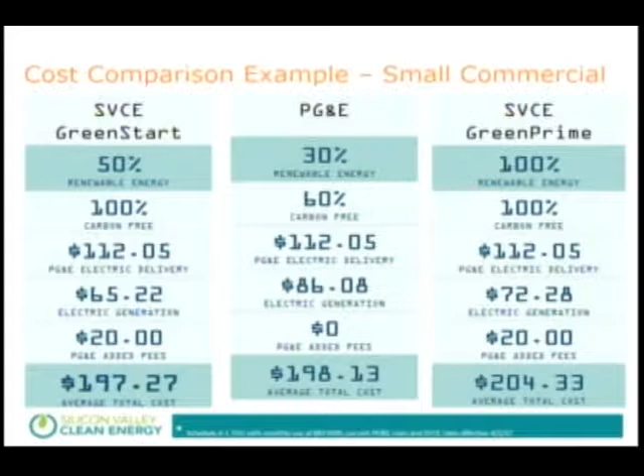2 enrollment phases, as I mentioned. Some of you went in April, most of you will be going in July. If you are a solar customer, you're on a slightly different enrollment schedule. You will enroll at or near your annual true-up date. So how many solar customers do we have here? Should have figured, quite a few. If your true-up dates are later in the year, you'll enroll either in October or in January, and the point is to try to synchronize it with when you would be approaching a natural end to your true-up year. If you want to go sooner, you can go on our website and enroll early.

So in summary, Silicon Valley Clean Energy is about clean electricity at competitive rates. By signing up and joining Silicon Valley Clean Energy, you're helping move the needle in an incredibly substantial way in terms of greenhouse gas emissions. GHGs in Sunnyvale and surrounding communities are between 20 and 25% of the greenhouse gas pie. We're providing carbon-free electricity that takes out that quarter of the pie.

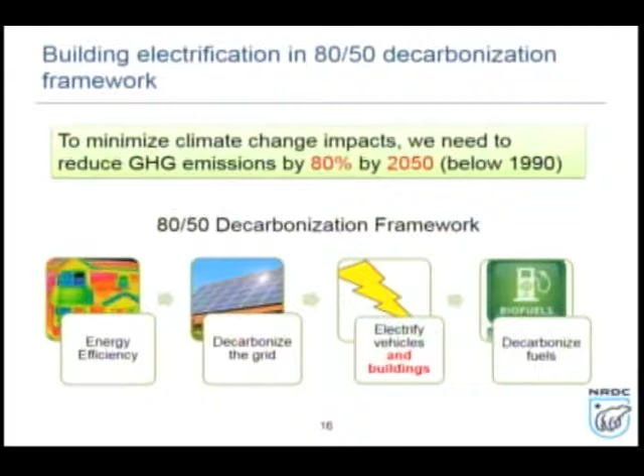Today, just to give you an idea, we're going towards 50% renewable electricity in the state by 2030. There's no target, not even 1%, renewable gas standard today. So we're far behind being able to decarbonize gas, although that's something we need to work on. With that in mind, let me dive into building decarbonization.

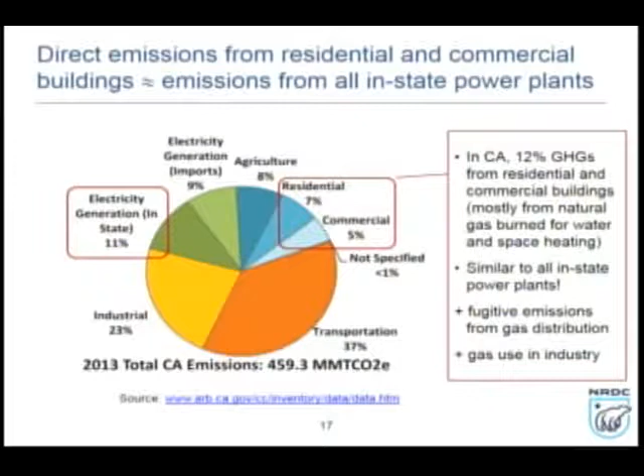And that was the case in California too 20 or 30 years ago, and that's why there's still a perception that natural gas is the clean fuel and electricity is where we have most of our emissions. But things have changed, and there's been a lot of progress.

So as Don said early on, if you either put solar panels on your roof or get 100% clean electricity from the community choice energy provider, you're addressing 1/3 of the emissions of your building. And there's still this 2/3 that remains, coming mostly from your gas furnace and your gas water heater. A little bit from cooking, and you don't have to stop cooking with gas, although you can.

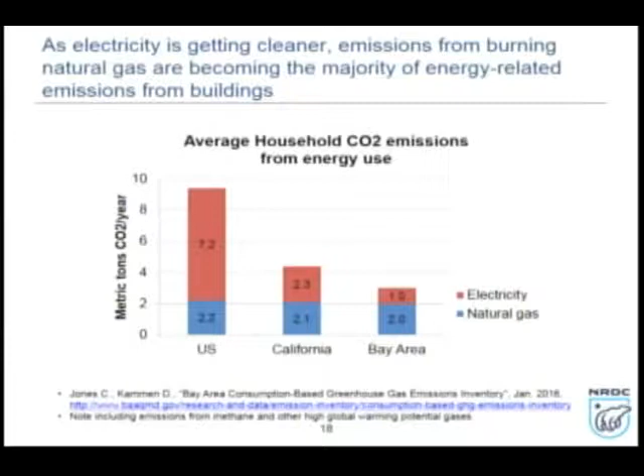And the good news is we now have technology called a heat pump, and I'm going to explain what it is. It's not a very sexy name, but it's actually a really cool technology. And this technology can electrify and address most of these emissions, actually 90% of these emissions.

So the first one is called a heat pump water heater. It looks very similar to the water heater you probably have in your house, except that it uses heat pump, electric heat pump technology, no gas.

Then you can have heat pump space heating, which replaces your furnace and again uses electricity and provides heat using electricity and heat pump technology.

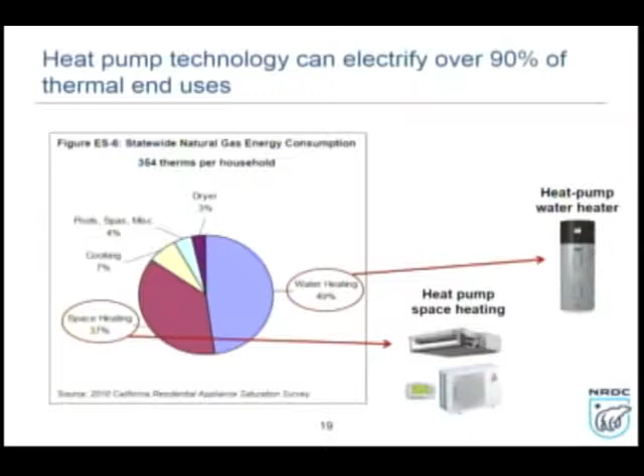And the last one is a heat pump clothes dryer. Clothes dryers today, some of them are gas, some are electric. Even if you have an electric clothes dryer, it's probably electric resistance, so not very efficient. Whereas now, and it's very recent, started about a year ago when it came to the market, you have heat pump clothes dryers, which use only about a third or a quarter of the energy of a standard electric clothes dryer.

So these are the 3 major technologies using heat pump technology.

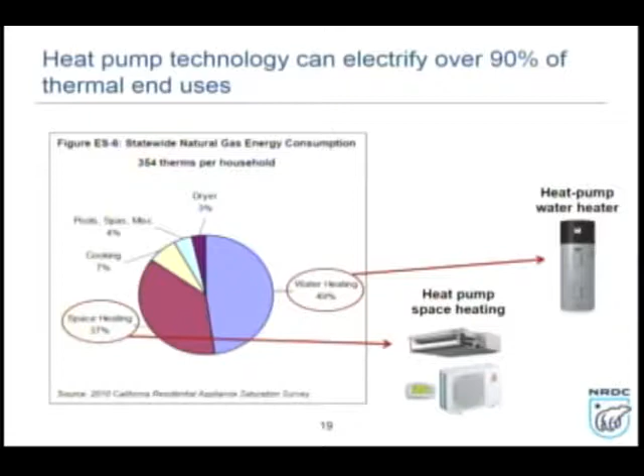Okay, going backwards. So what's a heat pump? Let me start by asking, who's got a heat pump in their home today? Okay, maybe 10, not even 10, I think. Right, so everybody's got a heat pump in their home. Your fridge is a heat pump, right? The AC in your car is a heat pump.

It's not in your home, but it's in your car. So basically, a heat pump is not a magic technology. It's just something that moves heat from one place. In your fridge, it moves the heat from inside the fridge and pumps it outside of the fridge. For a water heater, it does exactly the same thing in reverse. It moves the heat from outside the water heater into the water heater. It concentrates the heat into the water heater until it reaches the temperature that you need, and that uses a similar process as a fridge or an air conditioner.

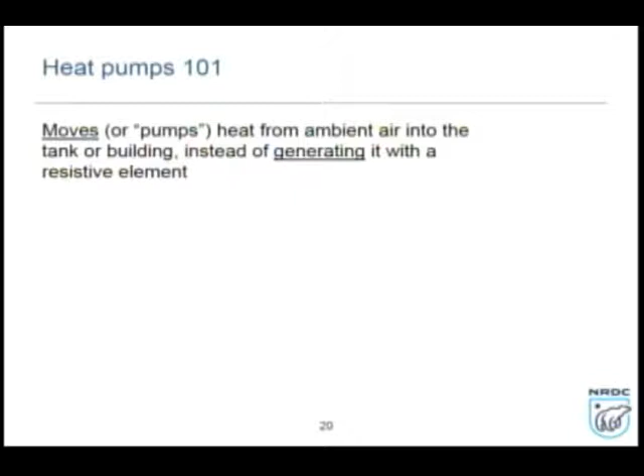The AC you may or may not have in your house, you don't necessarily need it that much, but in the valley, if you have an air conditioner, it uses the same process. It takes heat from the home and puts it outside of the home, and the space heating heat pump takes heat from outside of the home and moves it into the home. So it's AC in reverse. So, okay, fridge or AC in reverse.

So the diagram is a little bit complex, but basically what it does is use a refrigerant, which is a fluid that absorbs heat, which can be compressed and expanded, and basically releases heat in one place and absorbs it in another place, just moving around in the loop. With a compressor, most of the energy goes into the compressor, so that's the blue arrow on the picture.

For 1 kilowatt hour of electricity you put into the compressor, you can move between 3 and 4 kilowatt hours of heat from one place to another. So basically you have an efficiency of roughly, depending on operating conditions, between 250 and 400%. So how can you have more than 100% efficiency?

There's no magic involved. It just means that instead of creating heat or converting heat from burning gas or by running electricity through a wire, which is basically what electric resistance is, you're using electricity in a much smarter way. You're using electricity to move heat from one place to another, and that process is 300 to 400% efficient. That's why heat pumps are so important, because it's a super high efficiency process. If you power it with clean energy, you can reduce emissions dramatically.

Here's a picture of what a heat pump water heater is. Basically, you have a tank, just like a normal water heater. On top of it, you have a heat pump, which sucks in ambient air and captures the heat in that air, even if it's cold, even if it's maybe 30 degrees in your garage. Most of these are installed in garages in California. Even if it's cold, there's always heat in the air. So it captures that heat and exhausts the cooler air on the other side. That's how a heat pump works.

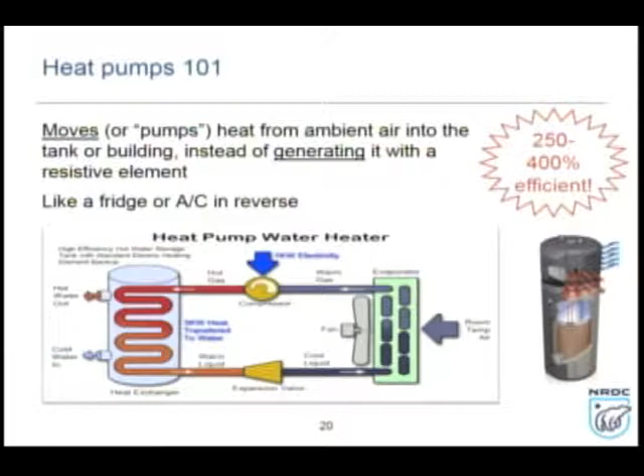So a couple more details on heat pumps. There are two types. The most common type is what we call a hybrid. Just like a hybrid car, a Prius, or other hybrids, it's got two modes. One is the heat pump mode, where it works at highest efficiency and moves heat from one place to another. But sometimes when it gets really cold, the heat pump can't do this work fast enough to actually provide the hot water you need.

Or if your kids come home from college and start taking hour-long showers, you need to boost that heat pump. So it has an electric resistance backup, the old-fashioned wire you heat by putting electricity through it. That's less efficient, but at least it provides the boost you need to make sure you don't run out of hot water. So the hybrid switches from one mode to the other depending on the needs. It stays in heat pump mode most of the time, but sometimes falls back into that electric resistance mode.

You also have pure heat pumps. There aren't as many of these. They're kind of new on the market, but they have higher capacity, so they can provide more hot water faster, and they operate at much lower temperatures. So they don't need an electric resistance backup, and they're more efficient because they never need to go into resistive mode. So, two modes: this one is the most common, the bottom one is more efficient but also more expensive. You never get anything for free. But it's good to know it exists.

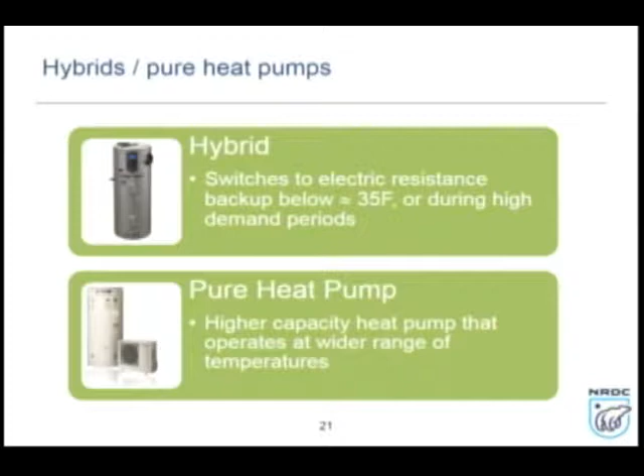Another thing that's important: there's a lot of confusion about different types of heat pumps, air source versus ground source. When we talk about geothermal, we mean ground source. You're getting heat not from the air but from the ground. You run pipes in the ground, either horizontally or vertically, and use that to extract heat from the ground. That's more efficient, especially when it's really cold. In the northern states or in mountain regions of California, that may be necessary, although it's not always necessary.

It's just more efficient. Air source heat pumps have progressed a lot, and now they're able to operate in really cold temperatures, down to negative 20 Fahrenheit, so lots of margin in California. But just know that geothermal heat pumps are more efficient but also a lot more expensive, depending on the model, maybe 3 or 4 times the price. Air source heat pumps are efficient too. They do reduce in efficiency as the weather gets colder, but not that much, and in California they're good enough in almost all cases.

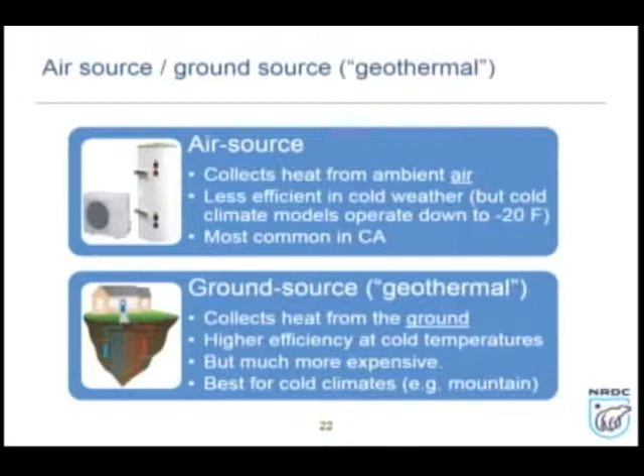Space heating is a little bit different. There's different types. One is central heat pumps, like your gas furnace. You still use the ducts, but instead of having the furnace itself, you put a heat pump that uses the ducts. So you have two units: one outside, on the side of the house, that little compressor unit that absorbs the heat and moves it into the middle of the house where you have the blower unit that uses the ducts. So it's called a central heat pump.

For smaller houses or houses that don't have ducts, you have ductless heat pumps, also called mini splits. Not very meaningful, but that's what the industry uses. These mini splits also have an external unit, but no ducts—they can move heat directly to each of the rooms. So if you don't have ducts in the house and have a wall furnace today, it might make sense to move to a ductless heat pump instead of installing new ducts and a central heat pump. And you're probably familiar with packaged terminal heat pumps.

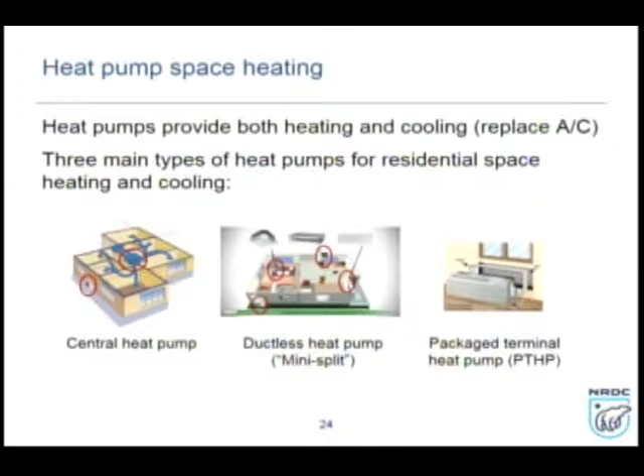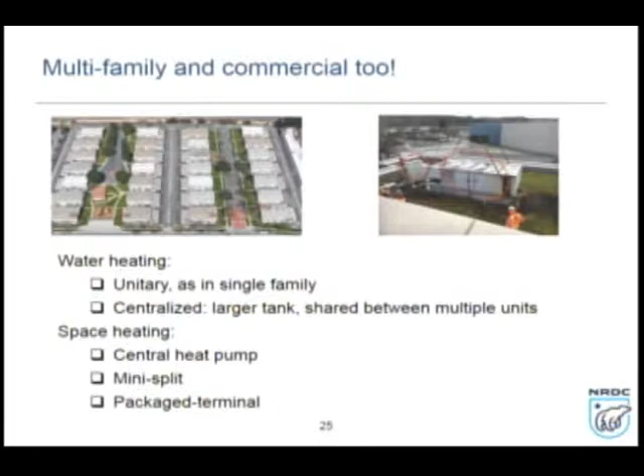Replacing a gas rooftop unit that's really inefficient with a heat pump unit and a heat recovery ventilator—so without going into detail, there are solutions for commercial spaces, which you have quite a bit here too. I'm not going to spend much time on this, but I want you to be aware it's not just about single-family homes, it's about multifamily and commercial. There are a lot of opportunities in all these spaces. In multifamily, you don't have to have a single heat pump per unit like I showed earlier—you can also have central heat pumps, where one heat pump is shared by 4, 8, or even more units, which is more cost-effective.

Okay, so how about solar thermal? I get this question all the time—how does a heat pump compare with solar thermal? So with solar thermal, you're just collecting hot water directly from the roof, and you're moving it into the tank.

So the answer is, from a greenhouse gas perspective, today with about 40-50% renewable, it's roughly the same thing. Because even with solar thermal, you still need a backup. In the winter, typically solar thermal doesn't provide all the hot water you need, so you need another backup water heater, which typically produces about 30 to 40% of your needs. And when you account for the emissions from that backup, it ends up being roughly similar to a heat pump powered by electricity, which is half renewables.

If you have 100% renewable electricity, then your solar thermal heater is higher emissions, of course. And it's also much more expensive, about twice the price. So I'm not against it. If you want to do solar thermal, I think it's a good solution. But just be aware that it's not necessarily better, and it's also more expensive than doing a heat pump and the PV to power the heat pump together.

So basically, a heat pump is solar thermal using electricity. It's the same thing, using electricity from the sun to heat water in a very efficient manner. I think there's probably a space for solar thermal to be part of the long-term solution, but in order to be a big part of the solution, it's going to have to come down in cost significantly. As it is now, it's probably going to be only a small part of the solution because heat pump is much more cost-effective and scalable.

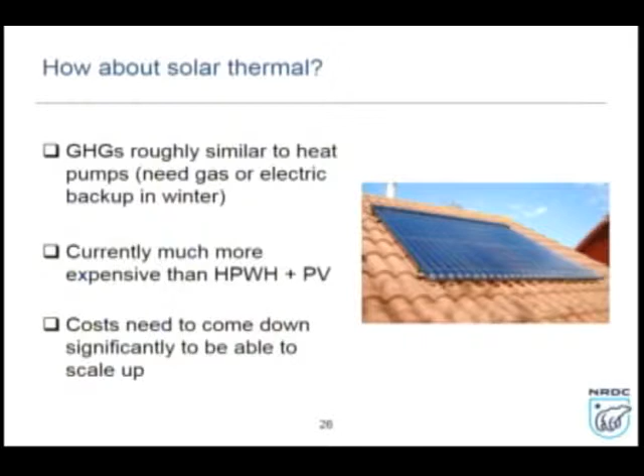Okay, so benefits of heat pumps. I've talked about efficiency, I think you've heard that. It's not the only one, and I've talked about emissions. I'm going to show you a chart about emissions next. But there's some other benefits.

First, you don't have gas. I mean, gas, we're used to it, but let's remember that it's not risk-free. It can leak, it can burn badly and produce NOx, different gases, or even carbon monoxide, which can be very dangerous. And although it doesn't happen very often, there are explosion risks. So nothing like this for electricity, much safer.

Bills, we'll talk about bills as well because it's a little bit complicated, but if done in the right conditions, it can reduce your bills. And that's something which is important. And then there's also the grid, and I'll talk about the benefits for the grid. So I think we have to think about the benefits, not just in terms of efficiency and carbon, but what are all the benefits? A lot of people, when you try to tell them about heat pumps, may care more about safety, comfort, bills, than about emissions, grid, or carbon, or efficiency. So we need to figure out what matters to people we're trying to encourage to switch.

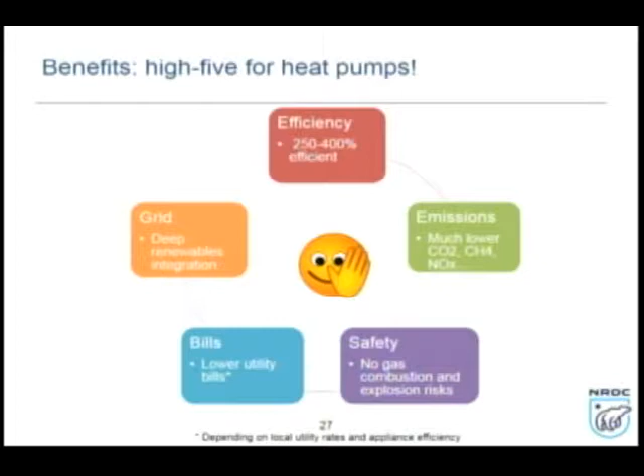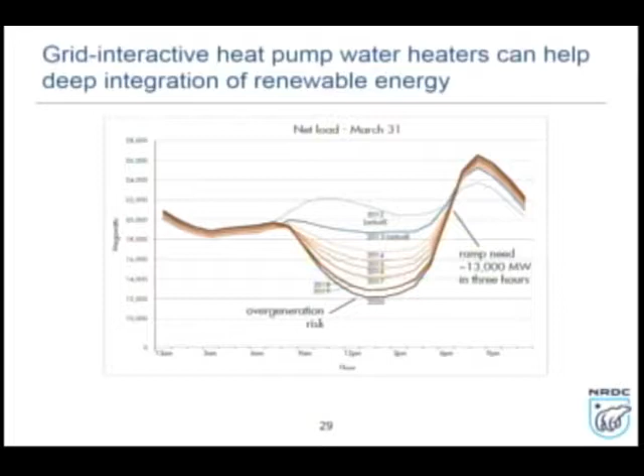So the good news is heat pump water heaters can be part of the solution—not the only part, but what they can do is run during the middle of the day, heat up that water, keep it warm so you can use it in the evening, throughout the night, and in the morning, and not kick in during those peak times. So it's basically a battery, a thermal battery. It charges during the middle of the day when you have a lot of carbon-free, cheap, and plentiful electricity, and then it holds that. It's like a battery—you can use it when you need it, when the electricity is not as cheap and as clean.

Yes, I've never seen this before, but if I understand this correctly, at the bottom or the belly of the duck, you're saying that we're generating so much energy as a community because people have solar and there's hydroelectric, and then there's this huge steep ramp at night. Right, well, so when solar goes down, end of afternoon, early evening, yes.

So why don't we, as an idea, use all that excess energy at the belly and pump water back to the top of dams? We do already, but that's not sufficient—just the capacity of doing that. That's part of the storage that we use today, but we just don't have enough dams to meet this—13,000 megawatts, that's too much. Battery technology is not up to the task yet. So I'm going to talk about this in a minute.

But this is one type of battery technology. It's a lot cheaper than some chemical batteries, but it's one type. So we need a lot of storage. At the moment, we have a shortage of storage. We need to smooth exactly, huge capacity. And heat pump water heating is part of that solution.

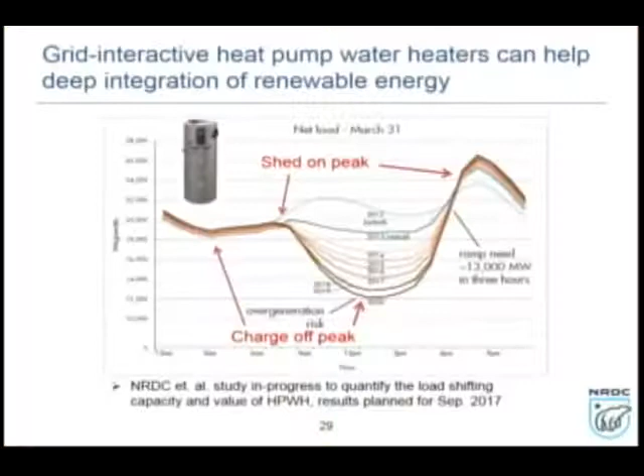All right, so this is the duck curve from the grid perspective. Now let's look at it from my own home perspective, my own duck curve, and I bet many of you have the same issue. In orange is my solar production on one typical day—a little overcast in the morning. I live in Berkeley, so there's a lot of fog around there in the morning. In blue is my consumption.

I started using electricity—this was in March, so it was dark in the morning—then probably went to work, didn't use much during the day, then got home and started using a lot more in the evening, but the sun was down, so it wasn't generating anymore.

So basically, from an import-export perspective, I import in the morning, I export a lot during the day, and I import again in the evening. In numbers, I exported 87% of my production that day, and I still imported two-thirds of what I used. So I have a lot more electricity, but I don't use it at the right time, and that doesn't work if everybody does this. At the moment we have enough other users that it still works.

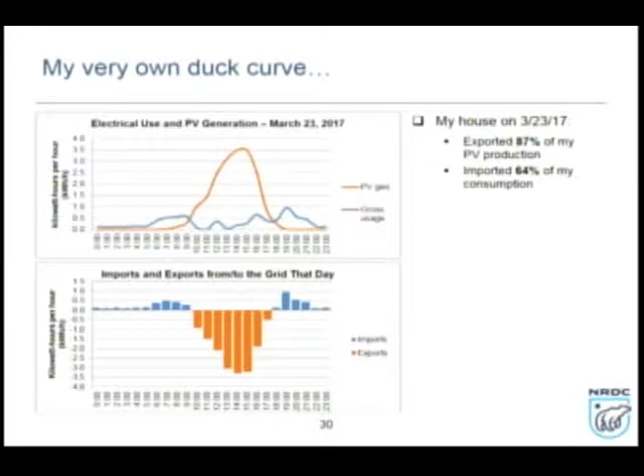Not everybody has solar, but if everybody has solar and we have 100% renewables everywhere in California, that won't work. So we need to better align demand with generation, and that's how we're going to be able to get towards 100% solar or 100% renewables.

I've talked about curtailment and low prices, caused by the imbalance between demand and supply. So load shaping, shaping the demand to better match supply, is basically what we need to do to help get to really high penetration of renewables. And there's two ways of doing this.

There's batteries like Tesla Powerwall, and there's heat pump water heaters. You have a water heater in your home anyway. If it's a heat pump water heater, you just add maybe a couple hundred dollars of controls to it, sometimes less, and here you have a battery with similar capacity to a Tesla Powerwall, about 3 to 5 kilowatt hours of energy.

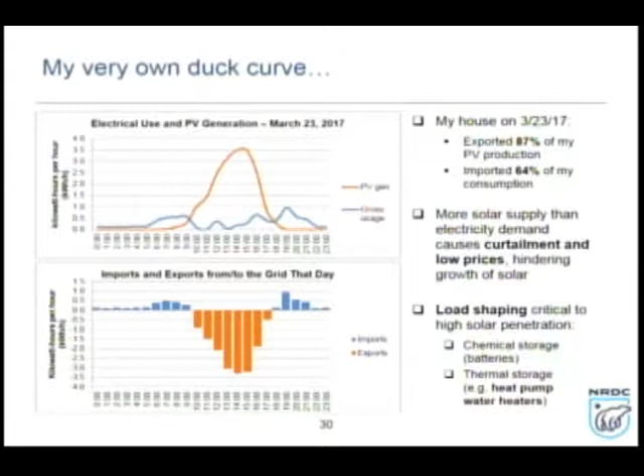So for $200, I'm not saying it's better, I'm saying it's different. This one is only for water heating—you can't use that energy to do other things, whereas the Tesla Powerwall or other batteries are more versatile. But it's a lot cheaper, and we need both. I'm not saying we need just one or the other, but this is a great opportunity to get really cheap energy storage and help move towards high renewables.

Okay, so this is fantastic. So what's the problem? Why don't we have heat pump water heaters everywhere today? Market share today is about 1%. And how do we get from 1% to 80 or 90% by 2050?

We have to transform the market, and the reason we're only at 1% today isn't a technology problem—the technology exists. We have a lot of market barriers, obstacles. We have an awareness issue. A lot of people don't understand what it is. Myself, before I started looking into it 3 or 4 years ago, I had heard about them, but I didn't really understand what it was.

When I changed my furnace, I put a gas furnace in—I didn't know better. There's this perception and great marketing strategy by gas companies that natural gas is clean. Well, it's cleaner than coal, but it's not clean enough. So we need to change that.

There's also people attached to gas cooking. Induction cooking is actually better, but people are still attached to gas cooking and haven't fully accepted it. That doesn't change for gas and water heating, but for going to an all-electric home—which is actually the most cost-effective way, costing less to build an all-electric home than a gas home—there's an issue with acceptance around cooking, which is the main barrier for people.

There's access issues. If your water heater breaks, you're going to want it repaired pretty quickly. How many days can you go without hot water? Most people want same-day replacement, which means it has to be on the truck or at least in the store, and the plumber needs to be able to install it the same day. Today, most stores don't stock heat pump water heaters—there's not enough demand—and most plumbers don't have one on the truck.

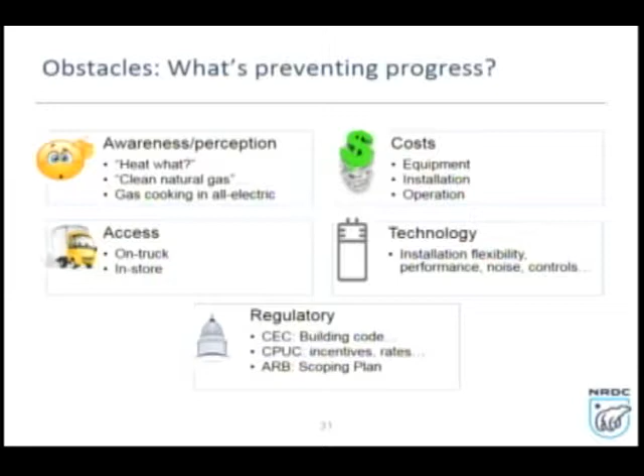So we're working on all of these things. It's going to take a little while, but even without it today, there are opportunities to switch already. So I want to address a little bit the cost question.

So here's, actually, I replaced my water heater a couple of months ago. I had an old gas water heater, 26 years old. Most replacements are emergency replacements - 90% of replacement water heaters are emergency replacements today. And when you're in an emergency replacement situation, you don't have time - you have to get it done within 12 to 24 hours, probably not much more than that.

But if you do a planned replacement for a heat pump water heater, if you know your water heater is getting towards the end of its life - more than 10 to 15 years old - I think it's time to start looking. If you have time, it took me 6 weeks to replace mine. I had to do the research, get bids from contractors, and decided I was better off buying it myself rather than having the contractor buy it and mark it up. I ended up buying it, arranging the electrician, arranging the plumber, and it took 6 weeks. But it's great, it works fine, and it wasn't actually that expensive.

So cost - upfront cost - and that's just retrofit. New construction is very different, because in new construction you have all the trades in the building already, so it doesn't actually cost more to do it there. But in a retrofit, when you already have it installed somewhere and need to switch from gas to electricity, there's a little bit higher cost.

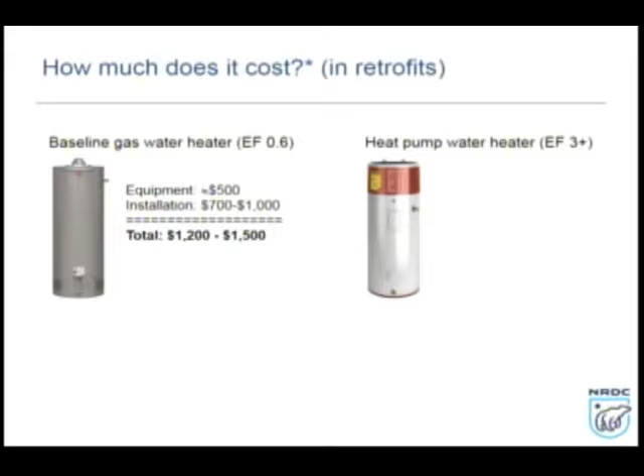So for gas, equipment is about $500, installation between $700 and $1,000, so you end up with between $1,200 and $1,500 to replace a gas water heater. For heat pump, equipment is more, between $1,000 and $1,500, plus if you need 240 volt electrical to operate it - and typically you don't have that where you have a gas water heater because they don't need 240 volts - you have to get an electrician to install conduit from the panel to the garage, which typically is where we install those in California, and that costs anywhere between $300 and $750. Then installation is a little more expensive as well. All in all, it's about $2,200 to $3,750, and that's just upfront cost.

It's going to cost less to operate, and we can recoup that upfront cost in most cases on utility bills. But it means you have to be ready to invest more upfront, just like buying electric cars, it costs more upfront.

If you can have rebates, that helps. So to get to near parity in upfront costs, which is critical if we want to scale the market, we need today about a $1,500 rebate. That's what Palo Alto offers, that's what SMUD in Sacramento offers. That's the type of rebate necessary to move beyond the early adopters. Early adopters are ready to pay a little more because they're sophisticated and understand they'll get the money back. But for most people, they're going to look at cheapest first cost. So today we still need rebates to move the market.

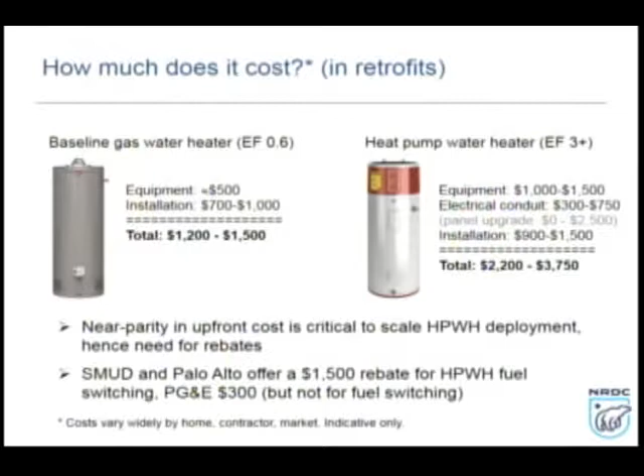So now, how to make it work? I mentioned there are situations where today you can make it cost effective, starting with upfront cost. For new construction, if you build a new home today, it's actually about the same cost for just a heat pump water heater. If you do the home all electric, you save a bunch of money because you don't have to connect that home to the gas line in the street, which costs somewhere between $8,000 to $15,000. If you can use that $8,000 to $15,000 to invest on the electric side instead, you can do a lot on your home.

So that's the most cost-effective way, all-electric homes. You can use rebates when they're available. Hopefully SVC will be able to offer rebates. SVC, as long as you don't use ratepayer funds, isn't subject to CPUC, so you have more flexibility, and that's one of the next steps - you may be able to provide incentives to help people switch. I mentioned earlier, if you're installing or replacing an AC, it's a great time to move to a heat pump heating system. And financing can also help get over that first cost hurdle.

From an operational cost perspective, how does the monthly utility bill compare between gas and electric? With PG&E rates, and probably SVC rates - standard rates - it depends what water heater you use and how efficient it is. But in some cases, a gas tankless will have lower bills than a heat pump water heater. So a heat pump water heater may have a higher bill than an efficient gas unit, but it's going to be cheaper than an inefficient gas unit. The gas tank I showed earlier, which is the most inefficient gas tank you can buy, that's going to cost more in utility bills than your heat pump water heater. So you can save money moving from that gas tank to a heat pump water heater. But if you have a gas tankless today, it's going to be about the same.

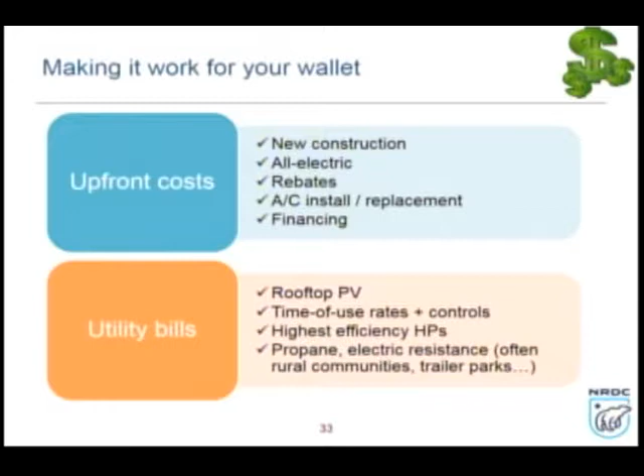I think I'm nearly done. Yeah, 2 more, I think, slides.

So there's one thing, from a policy perspective, talking to Sunnyvale policymakers today, we've developed a proposal. It's still very new, still going through the CEC for review. But one possibility to encourage adoption is to have a local ordinance, just like some cities are adopting local ordinances to say every new building, or major retrofit, needs to have solar. The state is going there by 2020. Some cities like Santa Barbara and others, Fremont just adopted it, required for every new construction today.

And instead of doing just for solar, you could do it for water heating. It would require that every new home needs to have what I call renewable hot water, which means either a heat pump water heater with photovoltaic, or a solar thermal with at least 60% solar fraction, meaning it provides at least 60% of your hot water needs. Or if you don't want any of these options, you can just do more efficiency. That's kind of a flexibility option, like an off-ramp, so people have a choice.

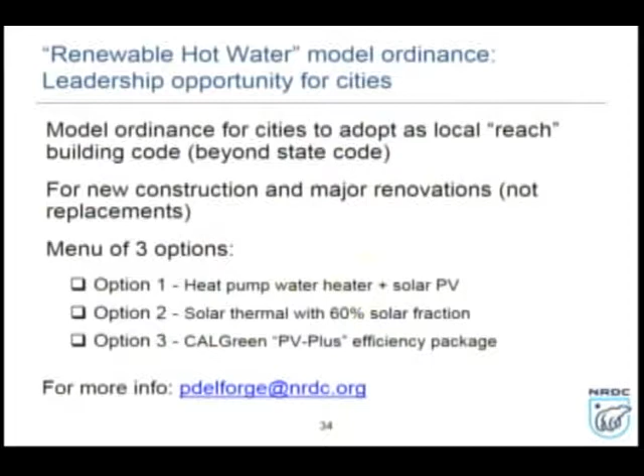In terms of benefits, from a homeowner or bill payer perspective, because they are pairing with PV, it reduces their water heating bills by 50%. If you look at overall costs, equipment, installation, and bill cost, it was still cheaper by about 13%. It reduces energy used by 30%, and CO2 by 50%. So, lots of benefits.

Something to consider in terms of what we can do from a policy perspective to move forward. I'm happy to talk afterward to anybody interested. There's a lot of cities right now we're shopping it around with, a lot of interest. Berkeley's looking at it, cities in San Mateo County, Marin County are looking at it. BayREN is doing a workshop to talk about this and others later in June. So this is new, but there's a lot of interest.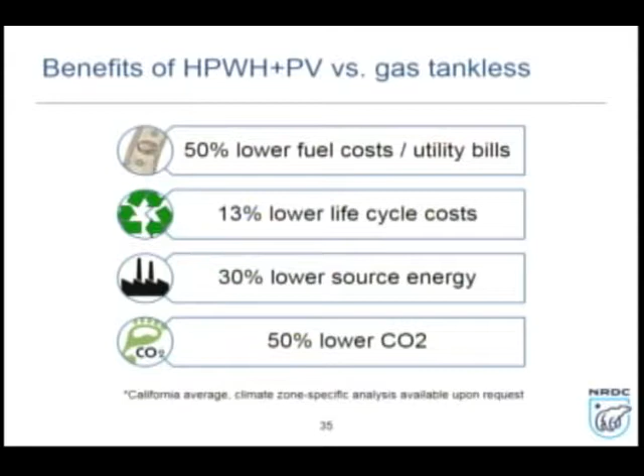So, this takes me to my last slide, just a conclusion. We have a huge challenge. We have a technology that exists but only has about a 1% market share. To meet our climate goals, we need to move to close to 100%, at least 80 or 90% market share. We have 30 years to do it, but these things, once installed in a building, last 15 to 20 years, so we don't have that many replacement cycles ahead of us.

And if you build a new home today for gas, it costs money to switch it to electricity later on. Because we're talking about things with a long life, buildings, space heating and water heating, we don't have much time to get it right, to get to 80-90% penetration by 2050. We need to get started. The next few years are critical in going from 1% to 5%, 10% market share, and building capacity in the market.

When you get to 1% market share, things cost a lot. You don't have volume, so manufacturers don't have enough volume to invest in making things cheaper. It's still early days, early adopter prices. But to get to much lower cost, we need to reach 5 or 10% market share. So how do we do that in the next few years?

And it's going to take a lot of actors together. Homeowners, if you are a pioneer or an early adopter, consider it. If you have one, talk about it. Have an open house, talk to your friends and show it off, and say how it works for you.

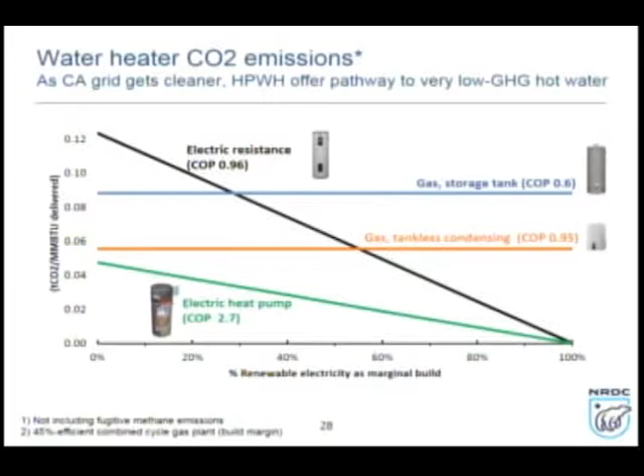Okay, James. So I've had a heat pump water heater in my garage for the last 3 years, and it's been just great. There's only 2 of us in our household, but I have it set - it's a hybrid model, but you can actually set them to be heat pump only. So I tell it not to do electric resistance, and I have mine set all the way down to 114 degrees, which just barely covers my shower and my wife's shower. So there's a lot of additional heating room if you want to set it higher. I've tested the lower end of it - there's a lot of capability for 2 or 3 people with my 50-gallon heat pump in heat pump only mode.

I also, because I have an EV, am on the EV rate - it's a time of use rate. As another gentleman was saying earlier, given the time frames of peak and off-peak costs for time of use rates as they are now, you of course want to use electricity when it's less expensive. But in 2019, more people will be on time of use rates, and the proposals are to shift those times to match the duck curve, as you showed before. So as you said, there are some changes coming. Matching with the time of use is a great way to save additional money, not only with an EV, but also with your heat pump.

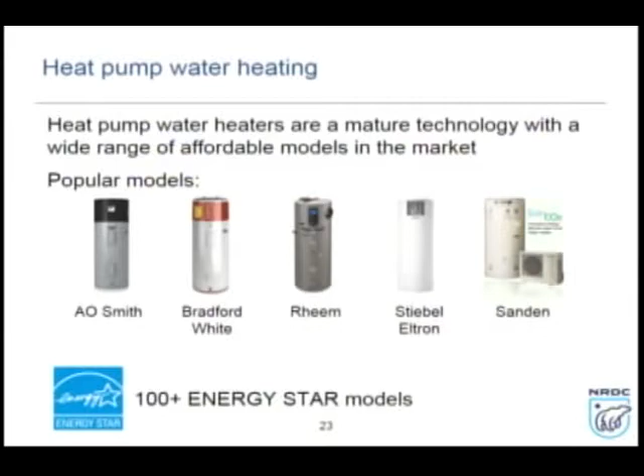Yes, there's one. Where is that slide? There's only one today, although I think there are going to be more. No, I think it's before that. The one on the right. This one's got an external heat exchanger, but there will be more coming on the market. For the rest of them, it's important to have them within the building envelope, right?

Not that you don't want them in a garage, for instance, an unheated garage. No, you do want them outside of the building envelope so that you don't scavenge the heat from that conditioned space. You mean if it's extremely well insulated? No, it's just basically you need to capture—the heat pump water heater captures heat. Oh. And if you capture it from your conditioned space, then you have to heat that space more. So it's an interactive effect between space and water heating. It's not a big deal—it doesn't negate the benefits, but it reduces the benefits.

But you have to be careful you're not losing the heat from the storage to the environment also. The storage loss is actually not that significant. If you use a decent amount of hot water, it's a fairly small portion of the losses. Okay, thank you.

I guess I'm a little surprised that we're just talking about gas water heaters here, because I possibly erroneously have always thought that gas water heaters use a lot less gas than a forced air furnace over a year. But I think one of your slides said that wasn't true. Can you correct that? Yeah, so it depends where. The slide I showed is the average for all of California.

In Southern California, they use a lot less space heat—it's a milder climate, so it's mostly water heating. And it also depends—I think in this area you use more heat for space heating. You're right, in this area. Do you know roughly what the comparable numbers are? It depends, I don't know the average—it depends on the home and the size of the family. I'd say it's probably 60-40 or something like that.